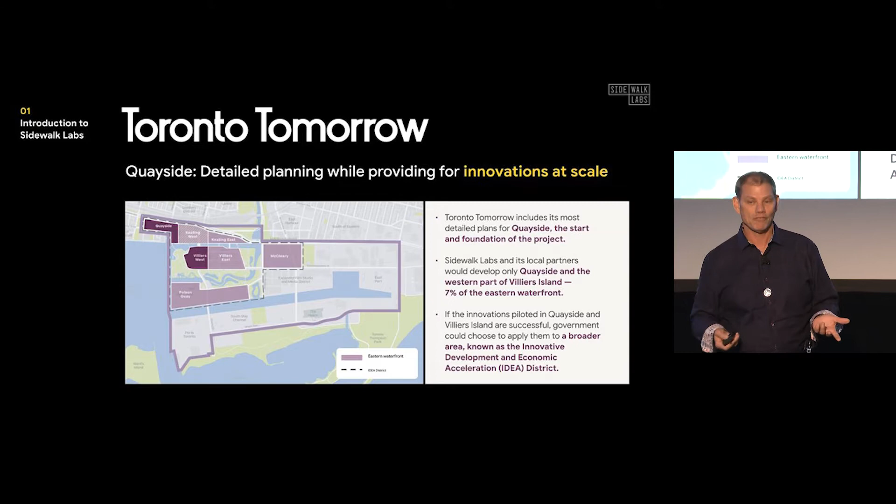At 3 million square feet, we couldn't get much efficiency out of it. The factory we want to build these buildings also needs about 5 or 6 million square feet to pay for itself. So we made that suggestion. That one got pushed back today in the note, and it will still be discussed, I'm sure.

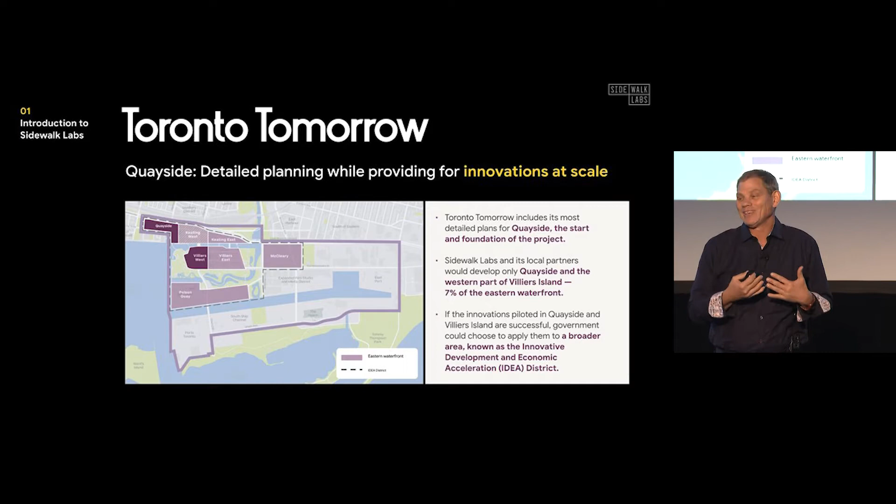The rest of the area, we thought whatever innovations really go well in Quayside should be multiplied across the rest of the area, because the more scale you get in exchanging heat, autonomous vehicles, factory buildings, the better and better we can get at it and show the world where it can go. Don't forget, phase one is only phase one—there's lots more development after that.

Here's a little image of what that could be. It's about 67% residential, a mixed use. This was diagrammed out with timber buildings throughout, so I think this would probably be the largest timber community in the world today.

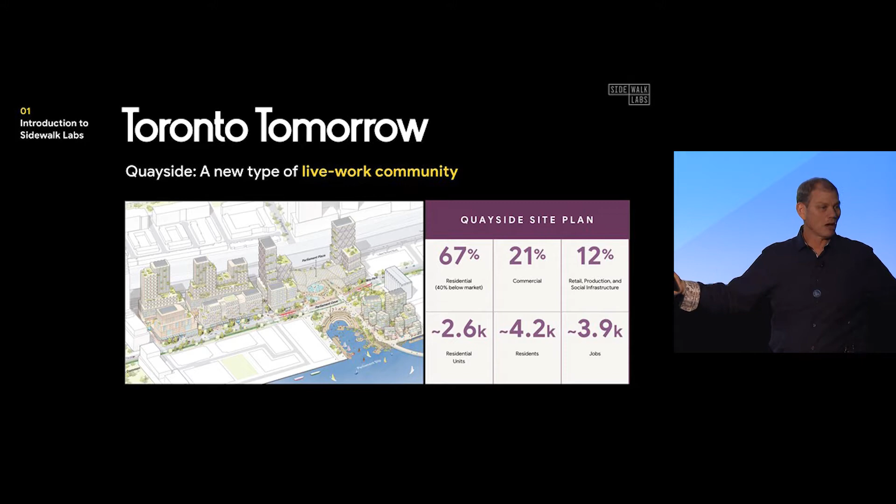Across the street, it's been awesome—other developers now have joined, and they are building 2 more timber buildings. That's done by the Hines Corporation, and George Brown College has their new library called the Arbor, also in that location. So we end up with this on both sides, not just our development but the whole area, an entire timber neighborhood.

So a little bit of our approach to design, this is around master planning. We use a generative design tool, and we ask which one is the best layout. Do you want daylight, affordability, walking, views? We ended up with thousands of variables, not just these, and we started doing iterations on how we could design the city. But we didn't just want to show the design of the city and how we could iterate it.

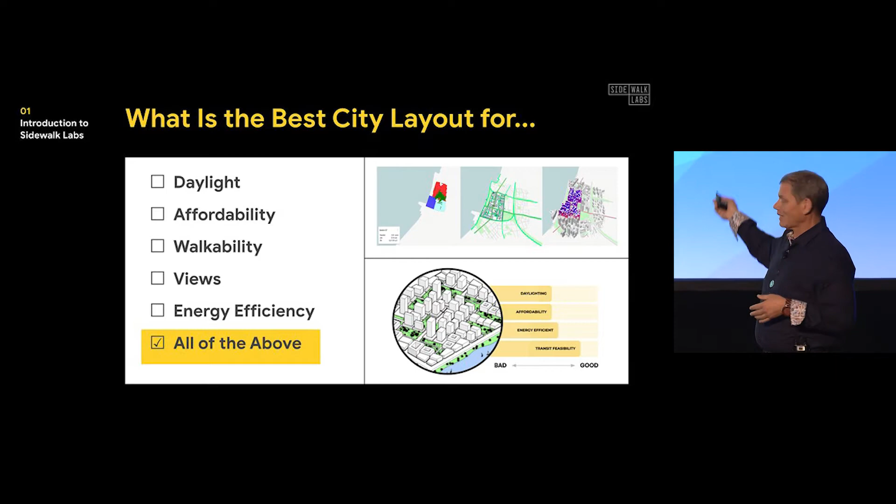We started modeling what the outcomes would be. So if I start finding spaces inside the city where it's dark, there's not much wind, and there could be a buildup of humidity, I have a mold area. We started to talk about how this would impact the operating model of the city if we know where these pockets are—can we change how we clean spaces day-to-day in certain places that have this type of environment? And in sunlit places, we could lower maybe some of the cleaning regimes we had.

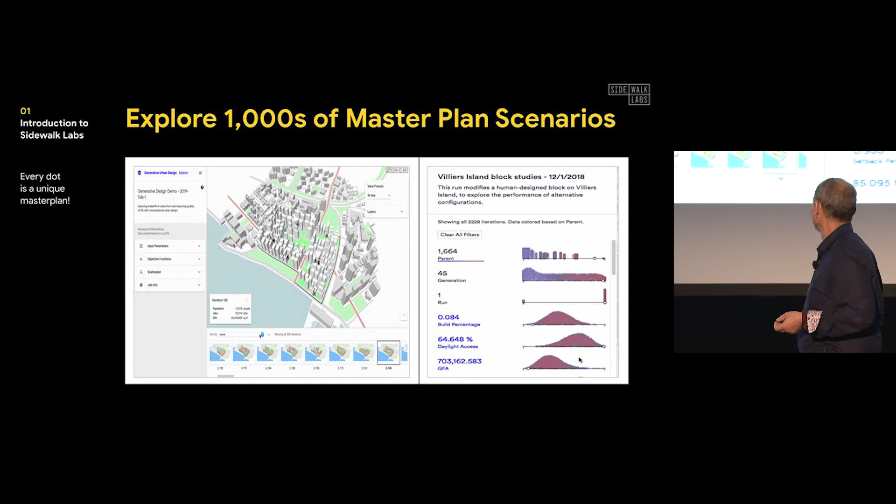So we started to optimize how the city would actually operate the streets. We started feeding the computer systems with all these different cities, so there were all kinds of variables of layouts that they could think through.

And then finally, we gave it back to the residents. We gave them 8 variables at a time—a couple thousand would be hard. They could dial in: do they want a park? If you get an acre of park, do you want it all split up against each parcel, or one big park in the middle? And the citizens then start to have trade-offs—how do I want to experience my city?

There's a happy face and an unhappy face, so if they hated their result they could vote on it, and if they loved their result they could vote on it too. They got to see all these variables: do you want one big dense building and lower other buildings, or do you want all the buildings to be about uniform? Do you want a grid pattern, and so on? This was terribly fun, I have to say. We'd get the results, and then change the variables for the next groups that came in.

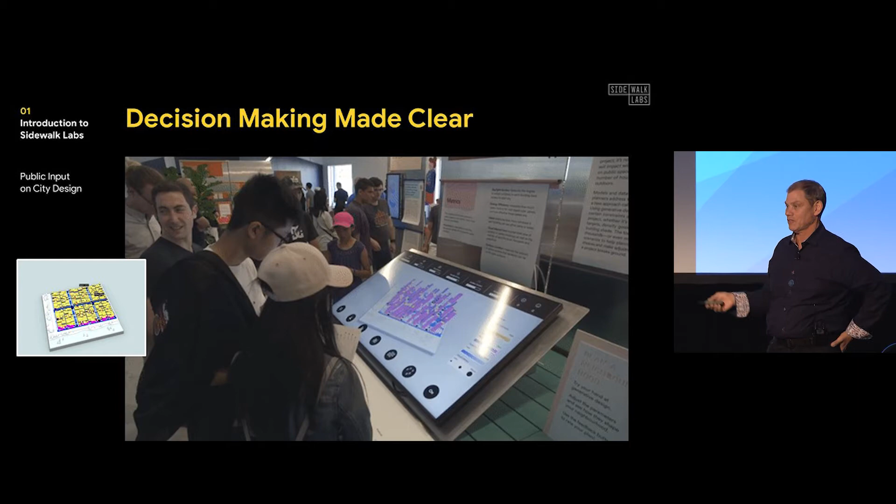So why mass timber? Why do we do it? Happens to be that Canada has a lot of it—they have about 10% of the world's timber.

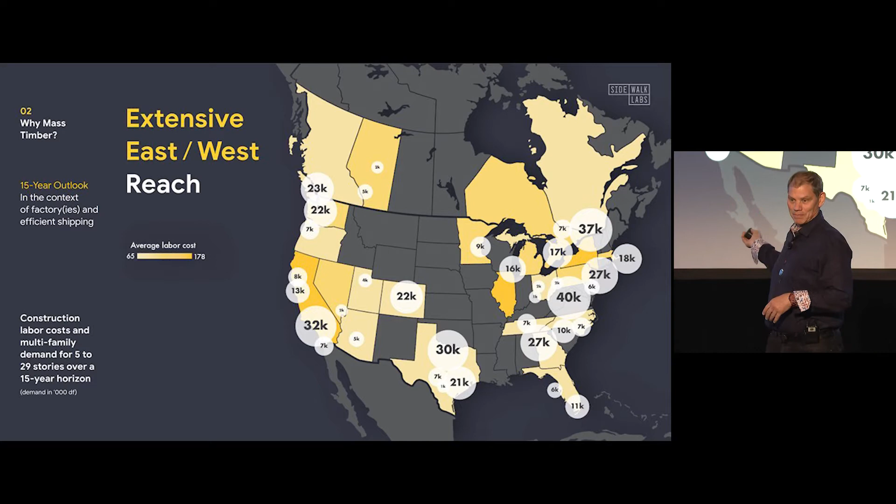Then we started looking at where we have a lot of tall buildings going up. The dark yellow is where labor prices are very high, the light yellow is where labor prices are quite low. So you ask, where can I have low labor prices in a factory supplying into a high labor price market that has a lot of buildings going up? You can see it splits up pretty much on the east and west coast. Texas is also in there, but if you note, their labor cost is quite low—it's a light color in here.

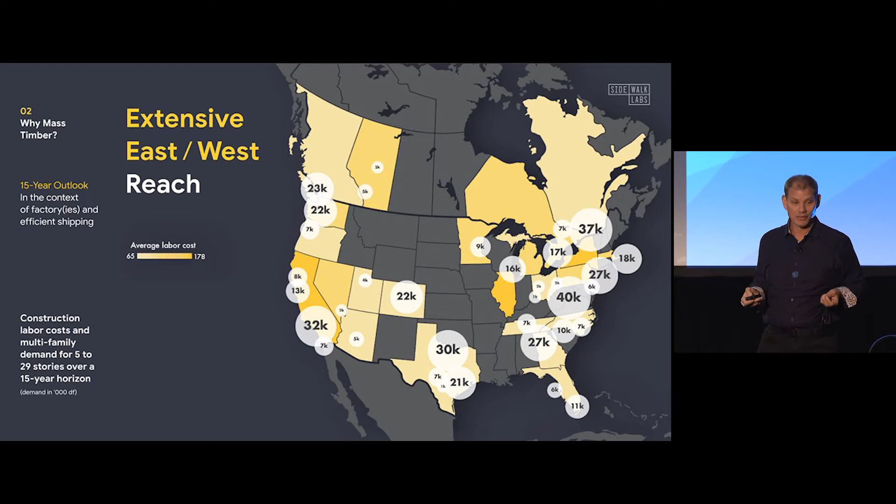But this is how we started plotting where we should put a factory to start building these buildings. Toronto, in the upper right, is actually in a pretty good spot to find a good labor market importing into a major city. Toronto is the fastest growing city in North America right now, by the way. So then we started looking at the supply chain.

So we need to go back to the forest. What kind of timber do we need to be cultivated? These are tree farms. How do we collaborate with the local sawmills so they create the right type of timber? Dimensional lumber isn't what we need. We need a very well dried out timber in order to make the strength panels for our buildings.

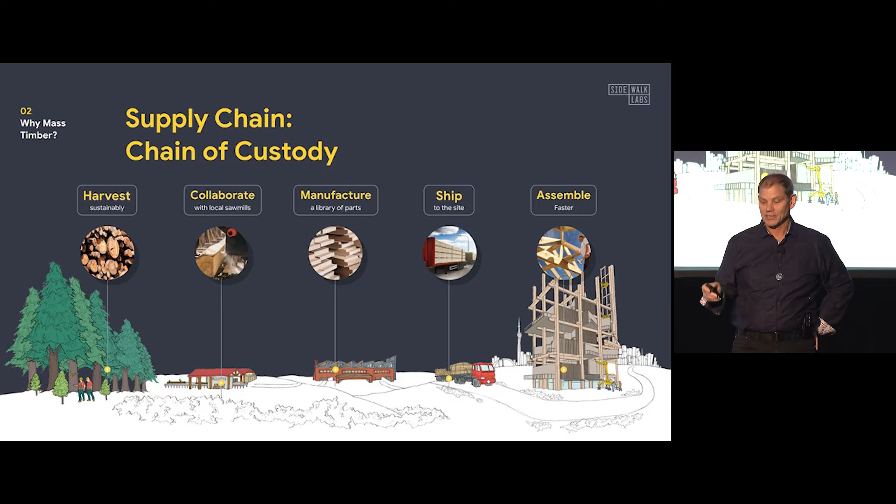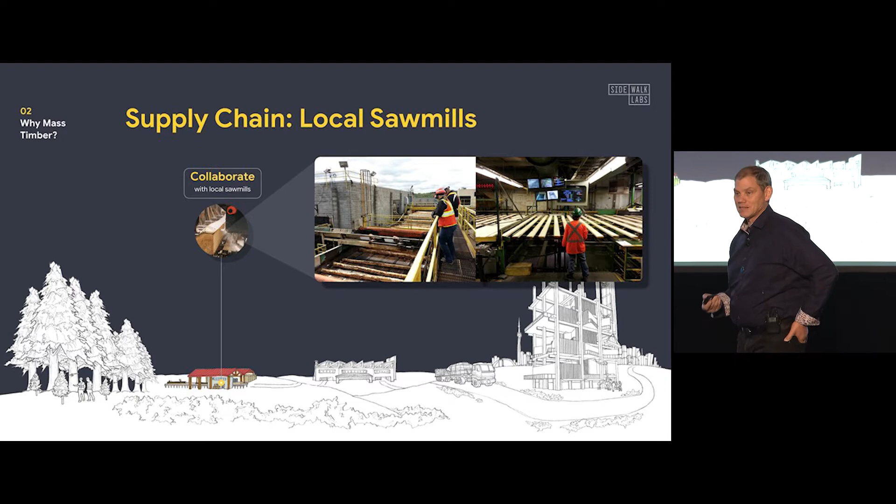And then manufacturing, shipping to the site, and then assembly. So we think all of our timber has to be certified by third parties. We want to collaborate with the sawmills so they make the right pieces that we need and the right species.

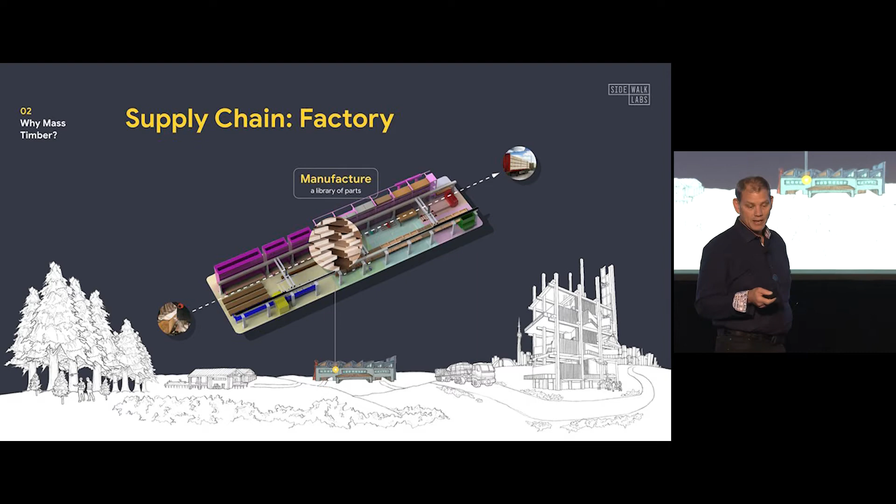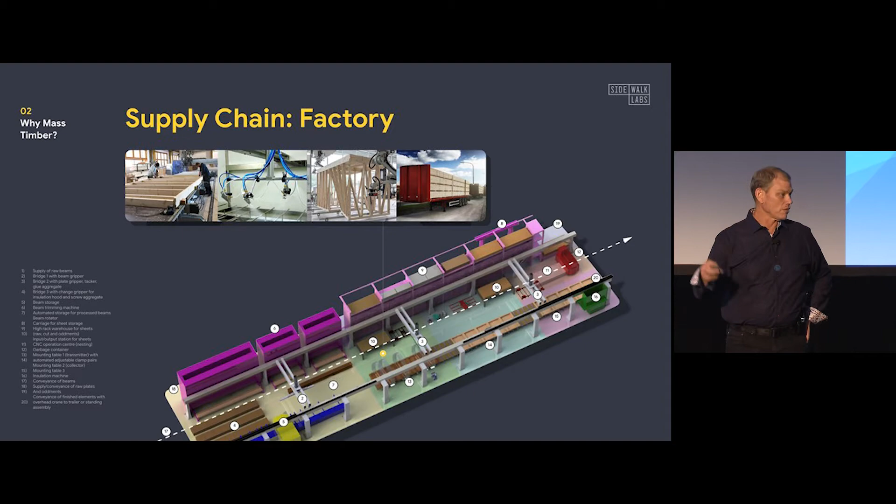We don't see anybody doing factories like this, especially in North America. You do find them in the Scandic and Alpine countries, but not in North America. So we started to design this factory. Our intention is to build an $80 million factory in the Toronto region to actually deliver all the buildings that we showed you on the 3.2 million square feet.

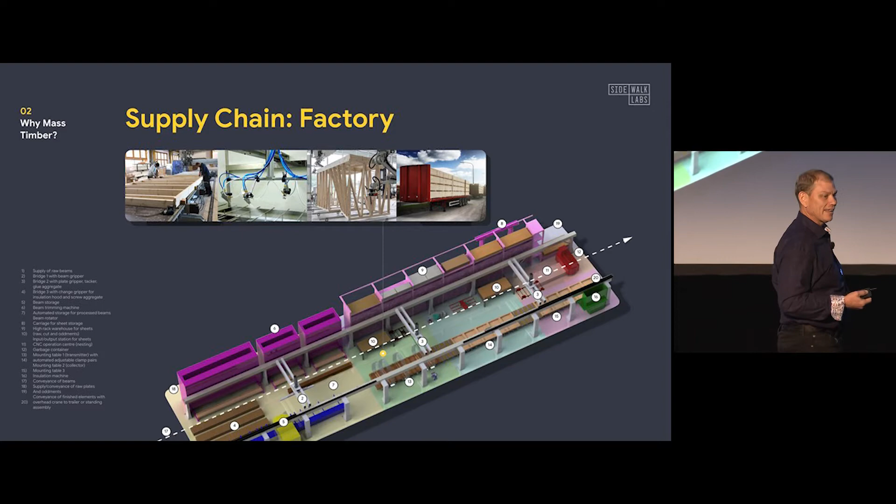We've been going with Swiss designers on factories. They have a lot of technology there. We look at how to do it by hand, and then we look at how to do it by robotics. We looked at our shipping, so the architects have to decide how big is the piece that they need to be able to ship, and how can we make that very efficient.

So the factory can be a longer distance if we know our shipping is very full. Timber is great for this because the volume of timber and the weight of timber max the truck out almost at the same time. Very unlike steel and concrete, right? You see a steel beam go down the street sometimes on a full truck.

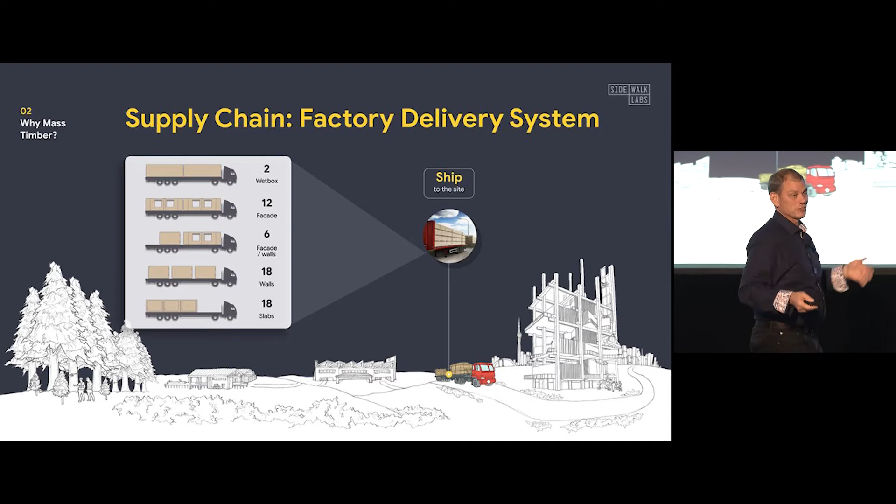In timber, you would always have a full truck. So we looked at, just for fun, this elevated highway. If we built a 30-story building out of concrete, and put all those concrete trucks bumper to bumper down the Gardiner Expressway, it would be 14 kilometers long. If we do the 30-story building in timber, it's 2 kilometers long.

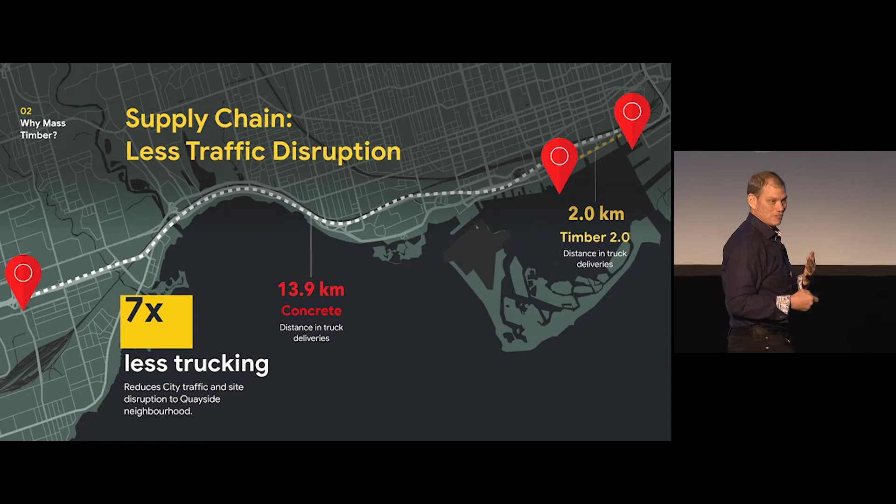So we have efficiency, but also we have disruption. We're mitigating, right? For the neighborhood and the road systems, and the wear and tear on the roads for all that trucking. So this is some of the side benefits that we're starting to get as well.

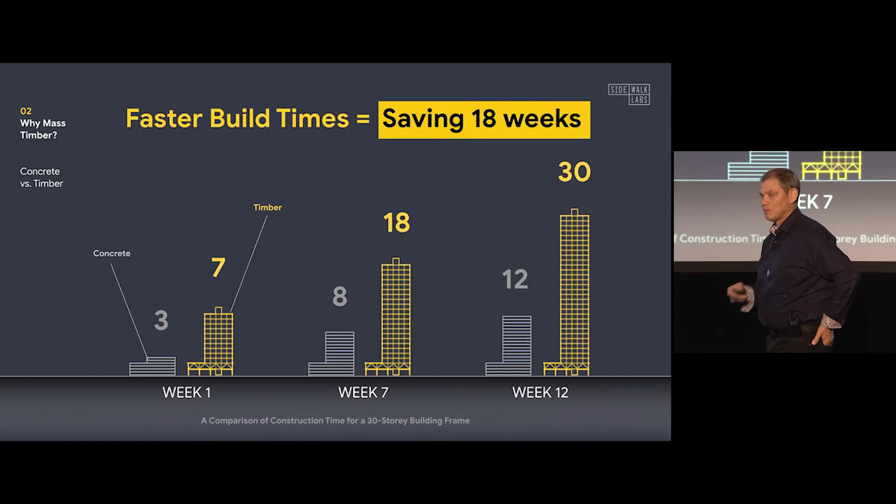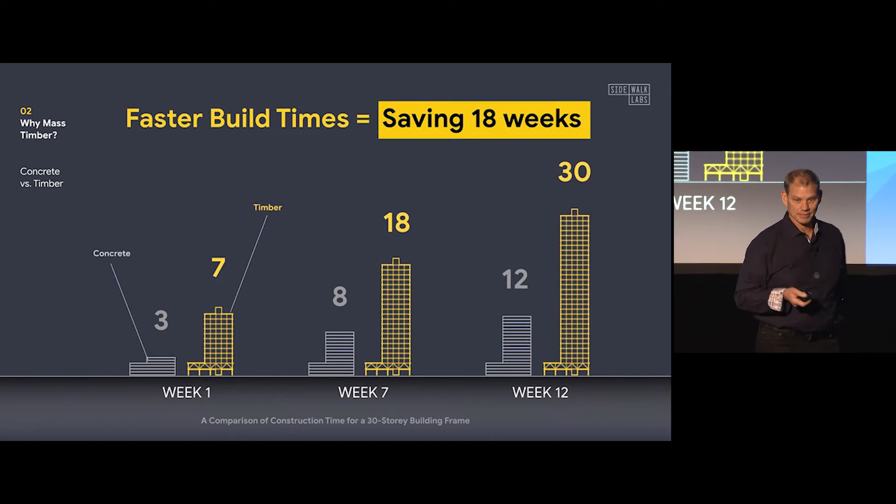So then we went into how do we assemble this building? So we modeled a building. Concrete is typically a 5-6 day cure, so you turn a floor about every week. So in 12 weeks, I can have a 12-story building. In timber, we can do a 30-story building. That's the speed of off-site construction, bringing those pieces in.

So I'm going to talk to you a little bit about sustainability. I'll go through some mass timber with carbon sequestration - you probably know a lot of it, so I'll go quickly. And some other important elements: cradle-to-cradle materials, biophilic design, reducing waste, and finally some hybrid electric systems.

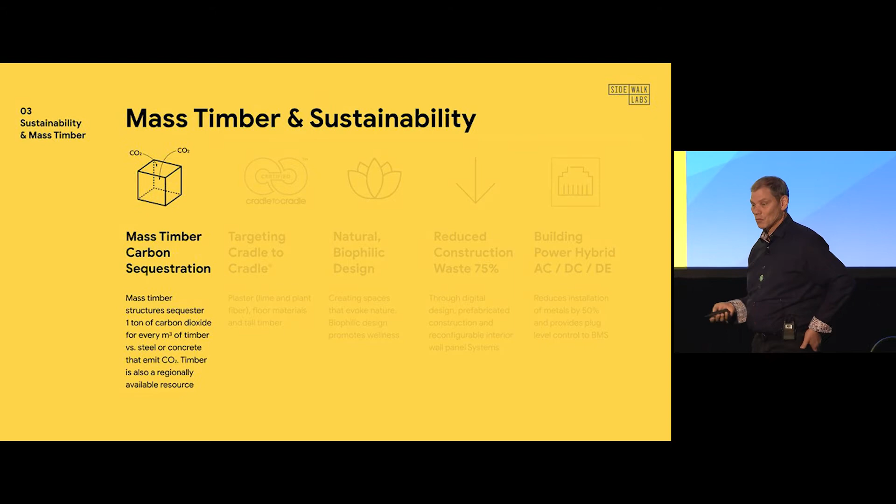So this is my diagram saying sometimes I think we don't build buildings, we're actually building carbon vaults. It's a nice way to think of it. People don't understand it, but if you actually leave those tree farms for those trees to die in 20, 25 years, they're going to re-emit the carbon dioxide that they have absorbed through photosynthesis back to the atmosphere.

So if I cut it down and put it in a building, I am now going to hold that carbon into that material for as many years as that building lives - 75 years maybe, let's pretend. But not only that, I'm designing my building to be disassembled so all those pieces can be used again in another structure. We do that already today, right? Barns - people who have flooring that they take from an old barn.

Well, that's the same kind of system. So what if we design that from the start so all those pieces can be reused? Wild.

We can keep them this way whilst carefully extracting wood and other products and valuing them as they are. By managing them well, we can work with their natural resilience to keep them standing.

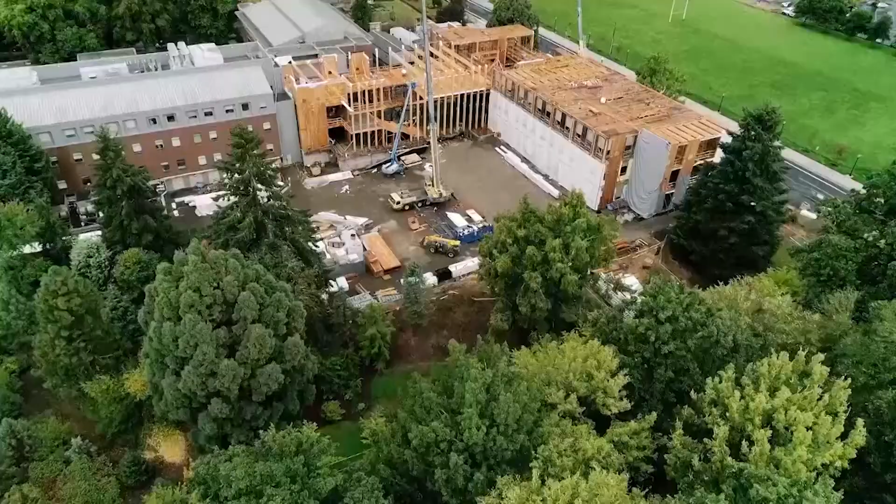It's a fact that our growing global population will need to use more wood. And that could be a good thing. Wood is an extraordinary renewable resource, and taking it from well-managed sources benefits forests and the planet.

But on their own, natural forests can't provide all the wood that we need. So we also have to farm trees, just like we do other crops, and create a new generation of plantations.

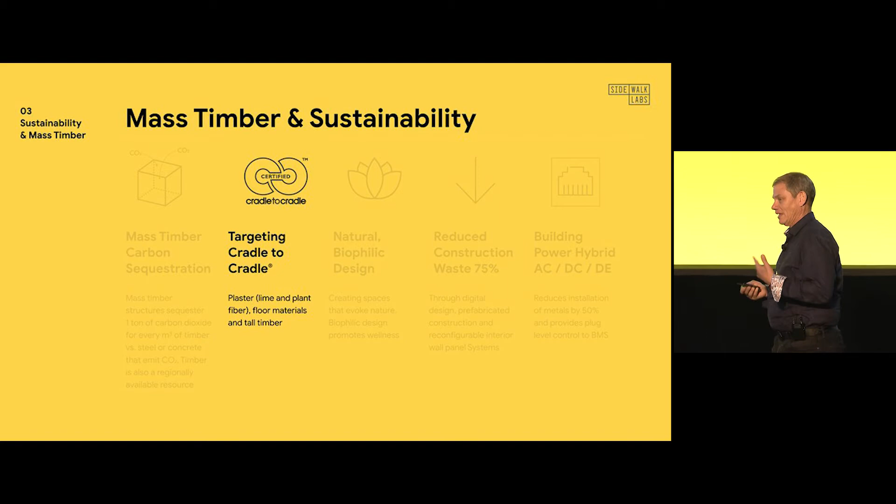It's great that David Attenborough did that for me. If you want to see it, it's on Our Planet, Netflix. It's a movie, about 20 minutes long, that goes further into this subject. I gave you just a little snippet here, but this is a big deal of where this is going and what we could do with it. I'll get to the depth of that at the end of my presentation.

We also went after cradle-to-cradle materials. We went after the materials that we think get reused the most, meaning during renovations they get disposed of and need to go back to their natural state. So we looked at the timber members themselves, but also came up with a plaster system, which I'll show you later, that's cradle-to-cradle and does our fire protection coatings for us. All of our cabinetry is the same, and our flooring we also buy as cradle-to-cradle materials. These are the things people consume and have to redo every time they renovate and occupy a building.

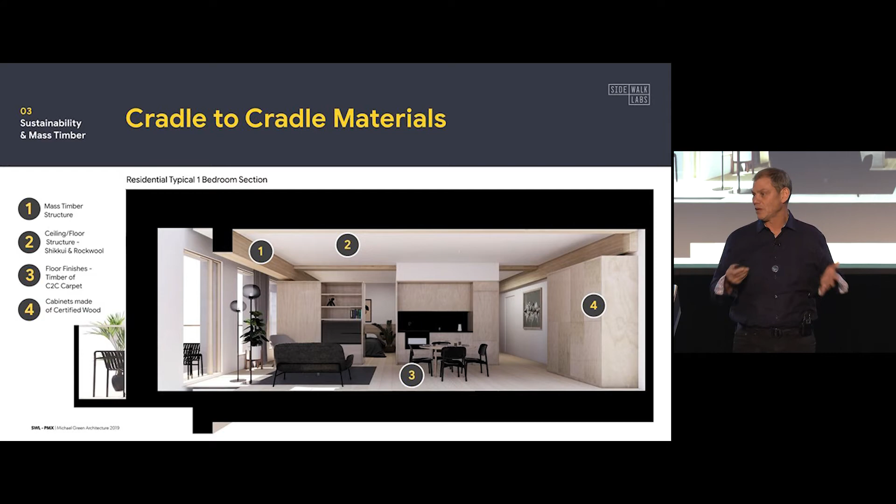Biophilic design is how these buildings make us feel, but better than that, they actually have a physiological impact on us. People's heart rates drop, you can measure the cortisol in their saliva and it goes down. So these are good for people. People heal faster - there have been experiments where they heal faster in timber buildings, people recuperating from operations, using the same operation in one building versus the other.

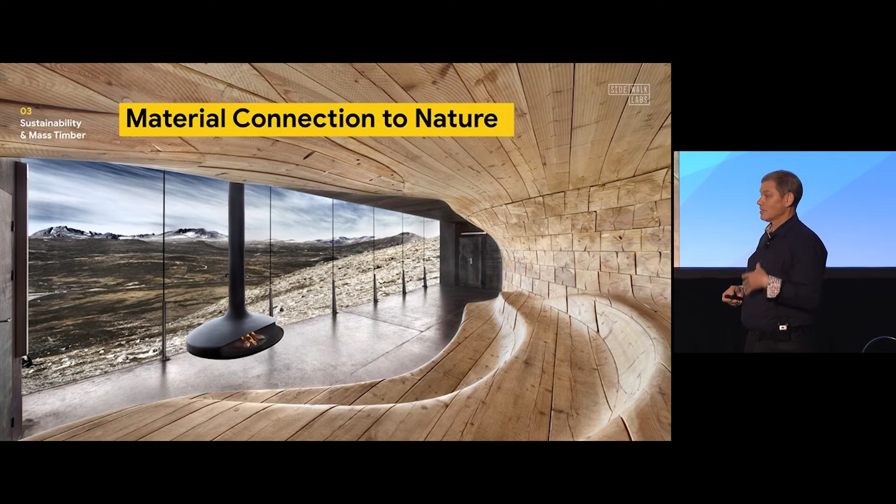We can reduce our construction waste, so that's not only the trucks coming in, but all the waste coming off the site. It's not only the landfill, it's also the trucking of all that material as it leaves - thousands of dumpsters.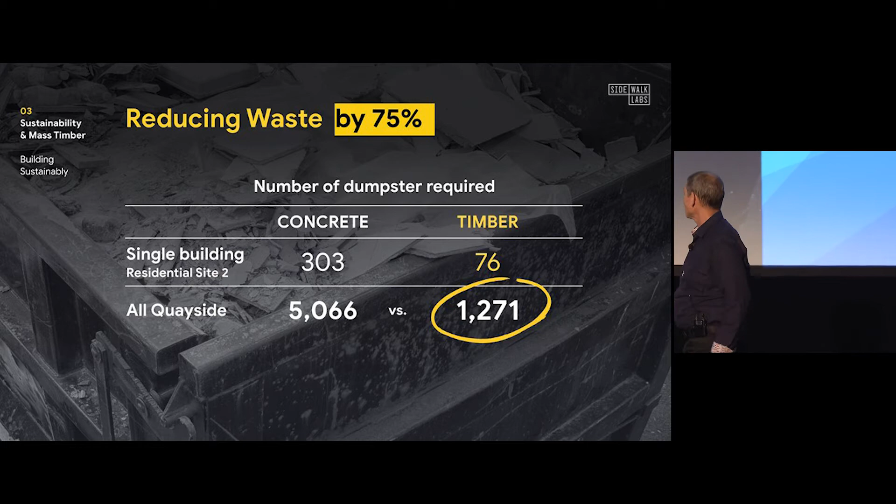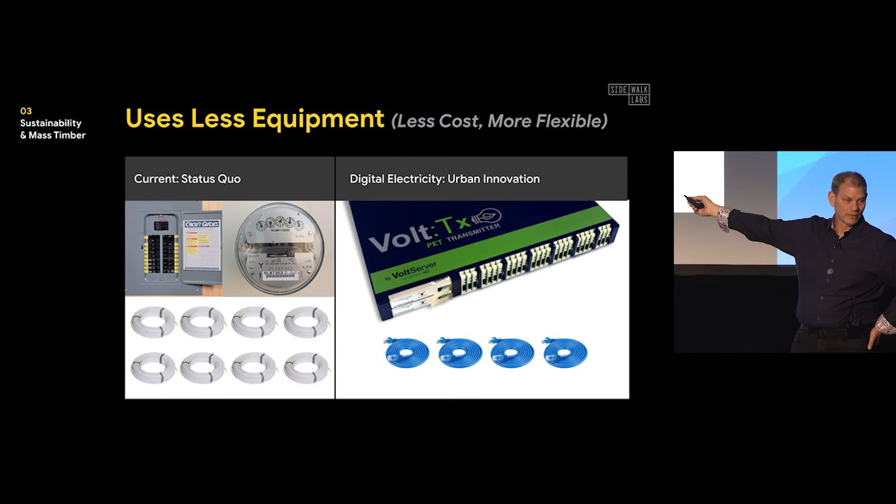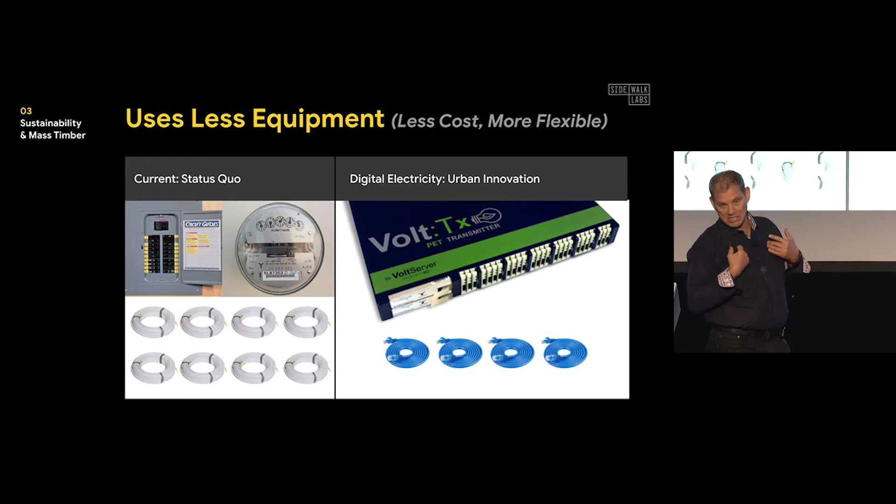And finally, energy, and this has a big impact. I'll get into it in quite a bit here. This is digital electricity. We're able to use this system to send between 2,000 and 3,000 watts over an 18-gauge wire - this is pretty close to a telephone wire. We can then get rid of a breaker panel, we can get rid of the meter, and we can get rid of half the cable. Every wall plug in these buildings will have an IP address, and now I can infinitely control the loads centrally - me as the tenant, maybe the landlord, whatever situation we're in.

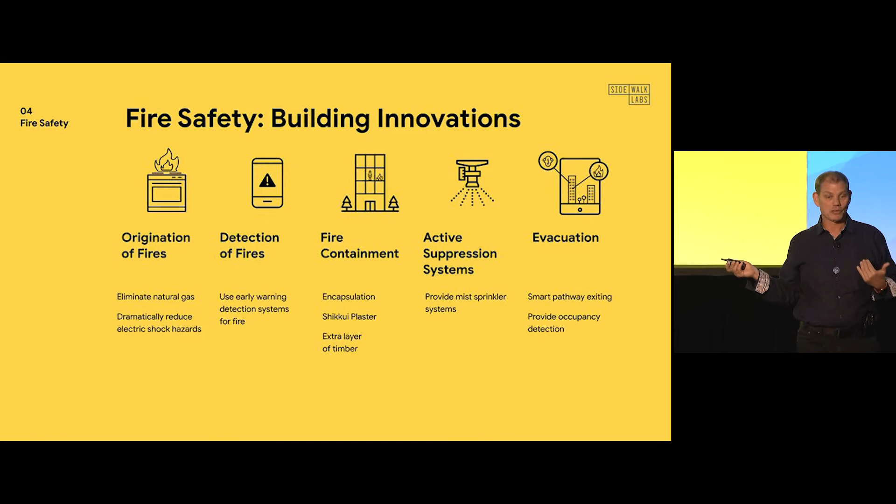So now I'll get into fire safety, and we'll get a little bit back to digital electricity. Everybody's worried about timber buildings burning and what's the impact. So we decided to take a step back and say, what's really fires and buildings all about? Maybe we should address this not just about timber, but just about buildings. That's what I'm going to show you with some of these pieces here. So we went after the origination of fires.

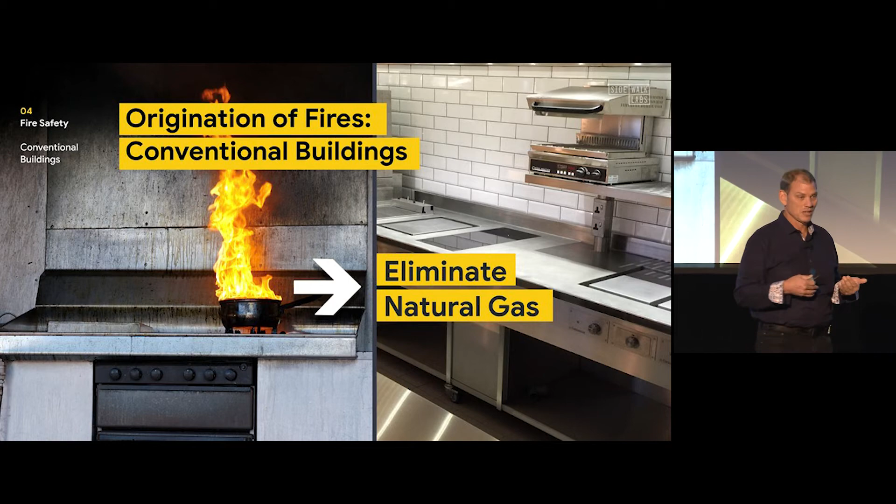So we aren't going to have natural gas - Toronto has natural gas in the neighborhood, but we are not going to have it, to meet our greenhouse gas standards. We also converted everything to electric - the whole building is electric. When we showed this to the firemen, they said that's not really helping me, because even those electric coils are a source of fire for them - a grease rag on an electric coil can still produce a fire. So we went to all induction, and when we did, they said now you're doing something really important for us. They estimate we could see between 10 and 17% reduction in fire source by getting rid of the heat in a kitchen.

So then we said, how about our electric system? This digital electricity, which I showed you before, ground faults 30 times faster than the fastest ground fault protection we have out there. It's now not rated as an electric system, it's a data system, so it doesn't go into conduit. I can run it on the surface, actually without an electrician, and it frees me of having another electric fire source - that's about 17% in Toronto. So between the two, I'm now taking away maybe 30 to 35% of the potential fires from a city. That's a big change for them, right? The fire department was really interested in this space.

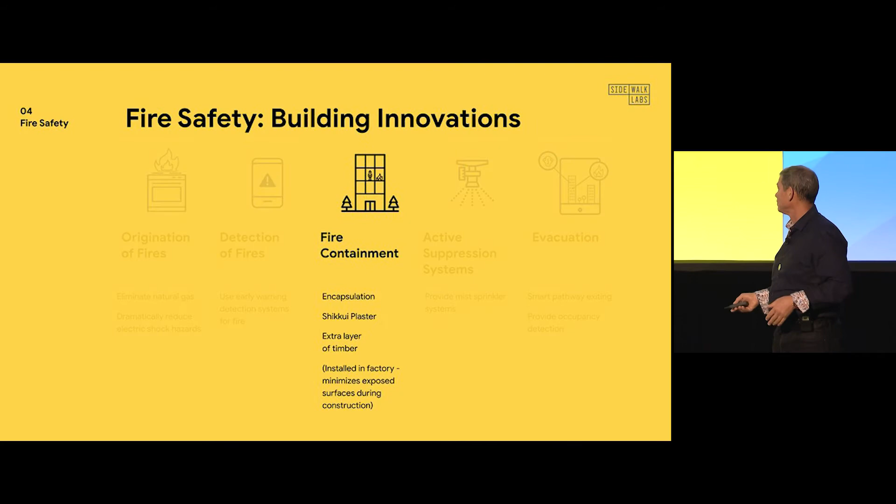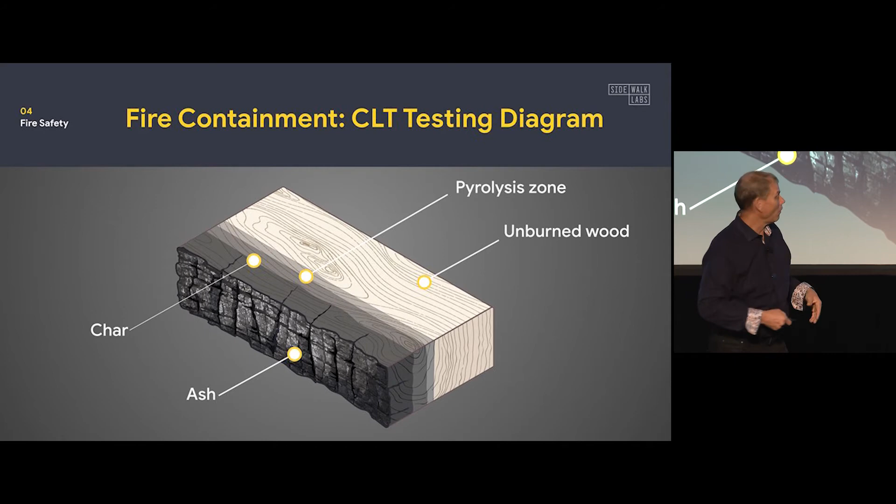Then I need to encapsulate spaces, and there's two ways to encapsulate using timber. Either I have the structural piece and add a layer that ends up getting charred and protects the structural core of the timber, or I actually coat it, and traditionally this has been drywall. We knew we were going to have these coatings, and we said, but we have this beautiful sustainable timber - let's coat it with something as sustainable. So we found a cradle-to-cradle substance called shikkui. It's only 1,000 years old.

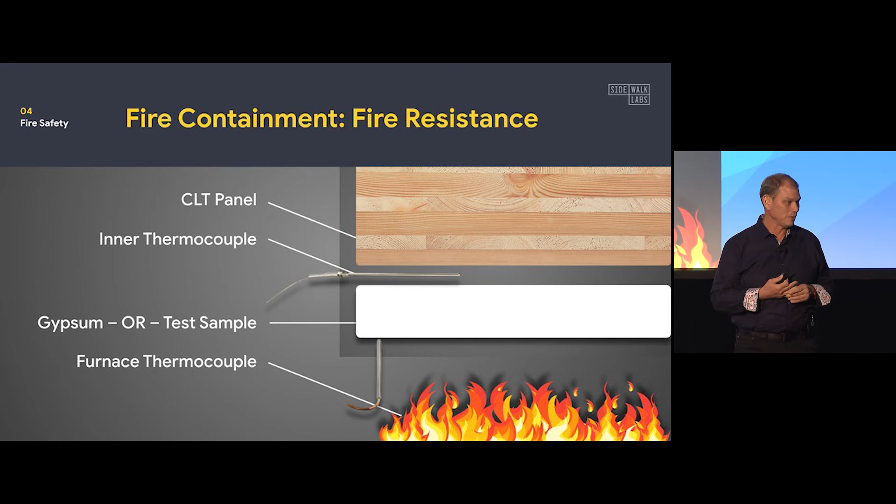This plaster is only 1,000 years old, and it's used in Japan a lot. We started changing the chemistry on it, playing with it, figuring out what type of slurries we could create with it and how we could apply it. Eventually, we started to build our floor cassettes and put the coatings in there.

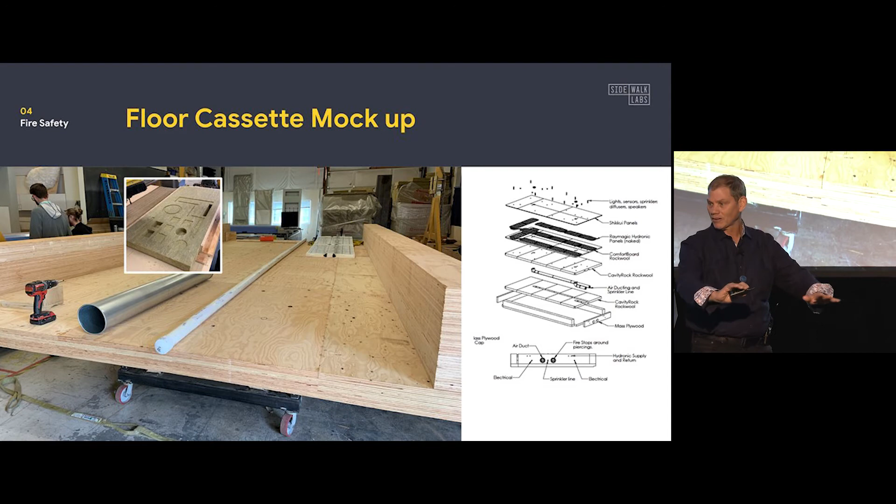We put all of our pipes in there, our radiant heating and cooling. We put rock wool in there as an insulator for sound and fire, and then we coat it with this plaster system. We took it to a fire test.

They did it in the factory, then we did it in laboratories. We've done about 8 of these. On the left-hand side you'll see the Shikkui plaster test, and on the right is the same test done with drywall. You can see the flames starting to come through over here—I'm talking about the two panels on this left photo.

So then when they lift it off, this is a furnace with heat rising. You can see that the Shikkui panel on the left is still basically the same, while the one on the right is charred through the drywall. Both passed the 2-hour test.

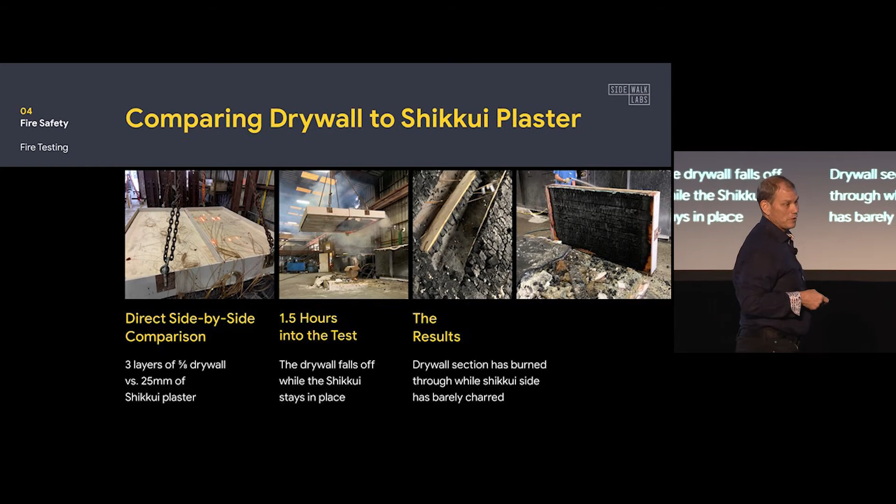But when the fire department sees this, they say, I'd like to walk into the building where the ceiling's not falling on my head. So we went through this, and now we're taking this to a slurry operation where in our factory we can pre-coat and fire-protect all of our systems.

And then finally, active suppression—we're using mist sprinkler systems. This is a 1,000 PSI system out of Finland, usually used in marine applications, with 3/8-inch tubing. We can now run that very cleanly inside our buildings. It uses about 1/10 the amount of water, and it also covers our lithium-ion batteries and kitchens, so we have one fire suppression system for the entire building.

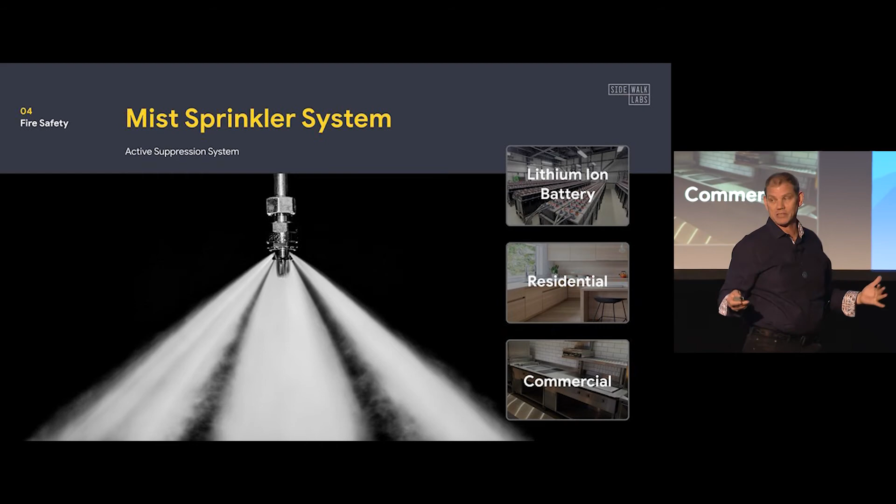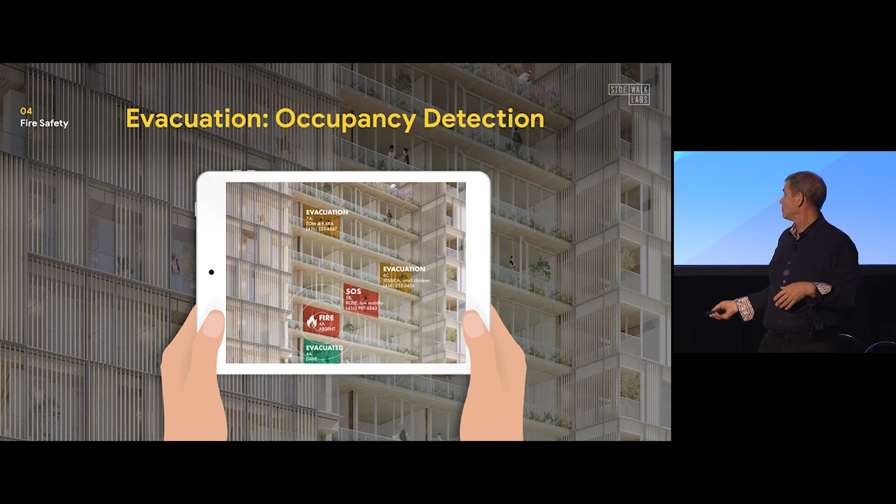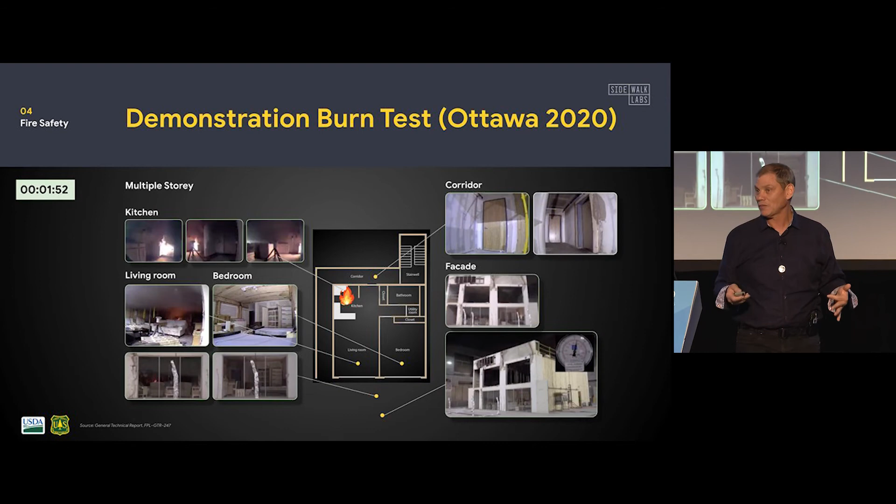We will finally do a demonstration burn, a 3-story demonstration burn, probably in Ottawa, to take a look at this. I thought it was kind of interesting—I wanted to show you that we didn't just look at fire, but how to protect the wood. We asked, how do we make a much better building out of this, and how do we take away some of the risks?

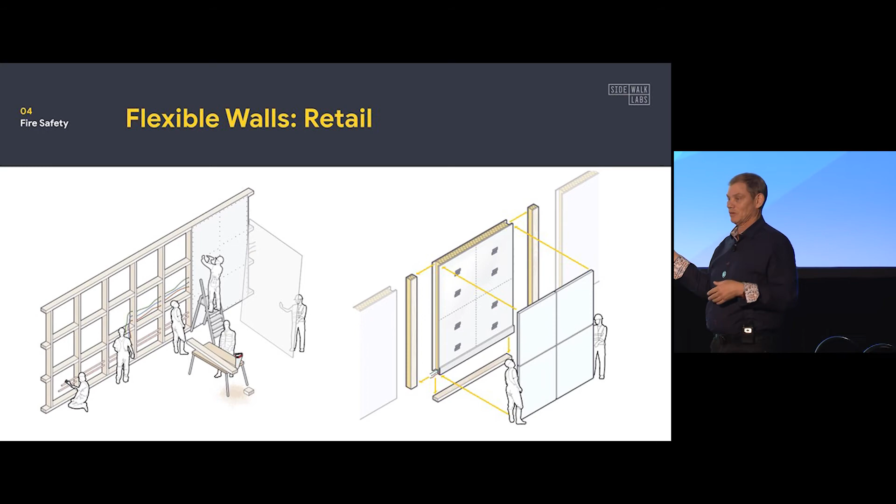So this is the outcome of that as well. On the left-hand side is a traditional wall with all those cables and sprinkler pipes passing through it. But now with my systems, I don't have sprinkler pipes I need to put inside—I can put my sprinkler pipe on the surface of that wall and hide it through a piece of trim or a reveal or whatever we can do architecturally.

And at the base, my electric system runs behind the baseboard. So when I'm renovating my space, I don't tear up the walls now, and I don't have a waste stream from that. I actually remove an entire panel out of a system, and I can even reuse that wall again and again. So we totally rethought something as simple as the wall.

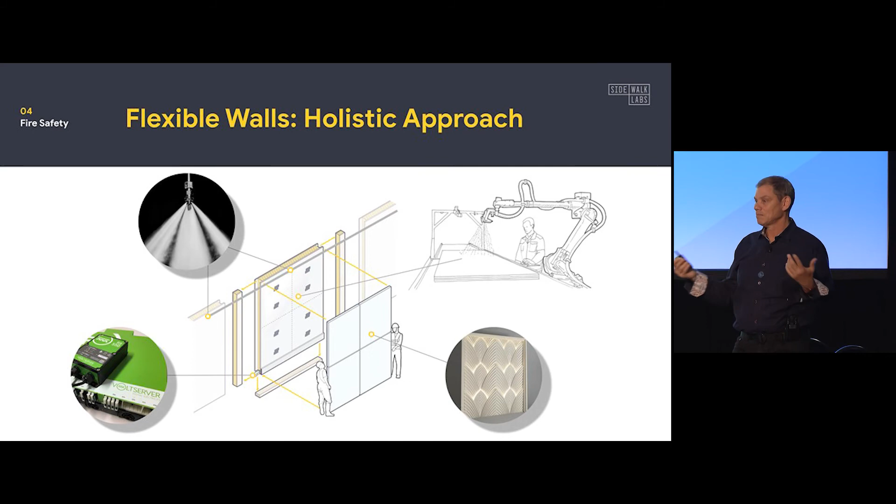That's kind of our DNA—to get back to basics and think about what we could do. You can see the sprinkler head is there, the electric system is there, the panel is coated with shikui, and on the bottom right we put something like a retailer's own branding panels on top of this. So now I want to go to the proto model.

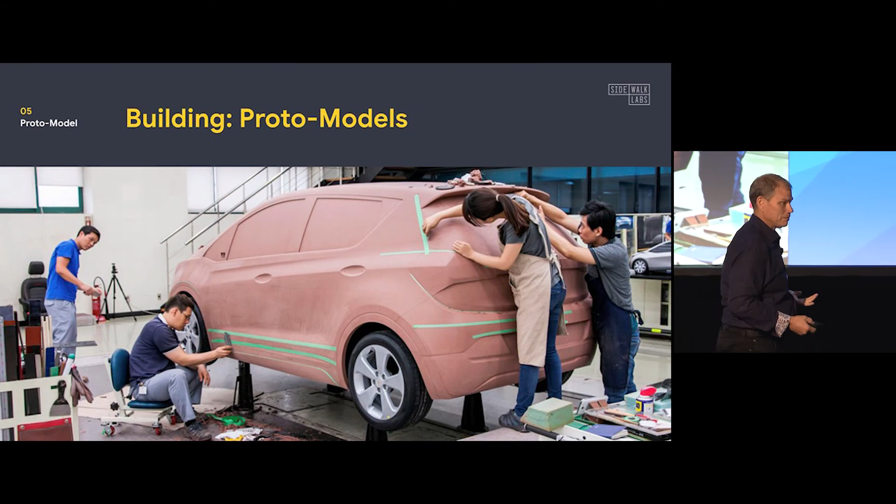We are building the foundation in the factory for great architects, like we have here today, to pick this up and do something with it, knocking out a lot of the guessing game of how to make efficient, well-insulated, energy-efficient buildings in a beautiful and sustainable material. So we went through first the massing, and then we went into a building we call the PMX—proto model X. X is cool, so we just used an X, I guess. But really, it was our workhorse; we put all of our innovations into one building.

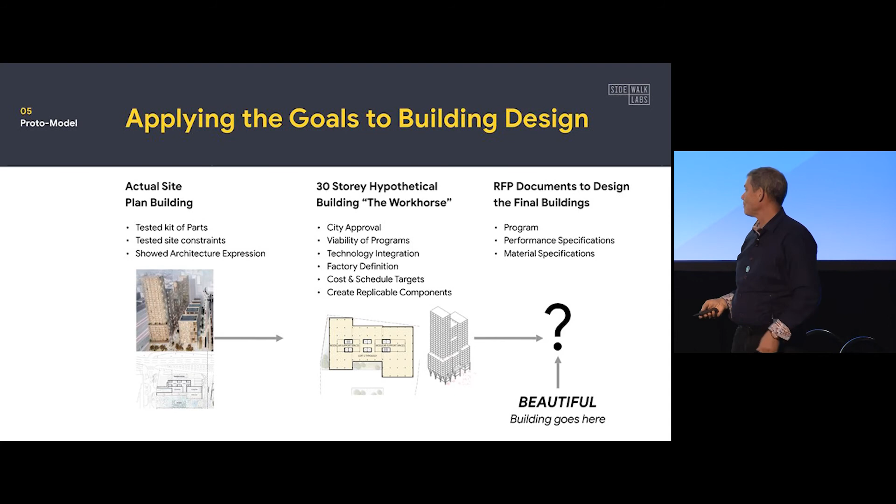And this is what it looks like: a 30-story building with an exoskeleton frame. The core does almost no work for us here—it's all really being done at the exterior. This is common in other architectures, but this was the most efficient way for us to do it. These were all the consultants that worked on it. It is a proto model, but it was a full team and full analysis.

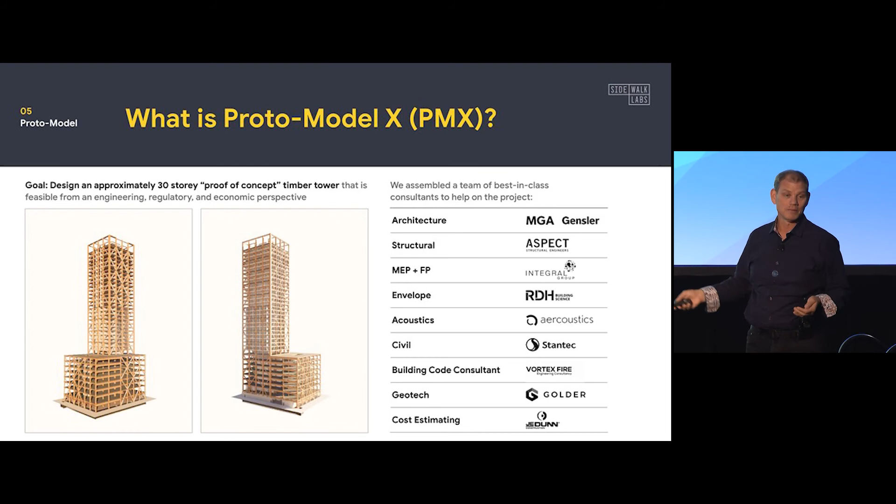Site massing program - we looked at programs of all the different things: ground floor plane, commercial space for offices, different types of residential, all the typical things. And if you look at the efficiencies, we wanted to be as efficient as other buildings in the marketplace.

Our offices, our floor plate's 88% efficient in timber. Our residential is a little bit lower, and that's because all of our waste has a vacuum system, so we have 3 chutes that vacuum it out.

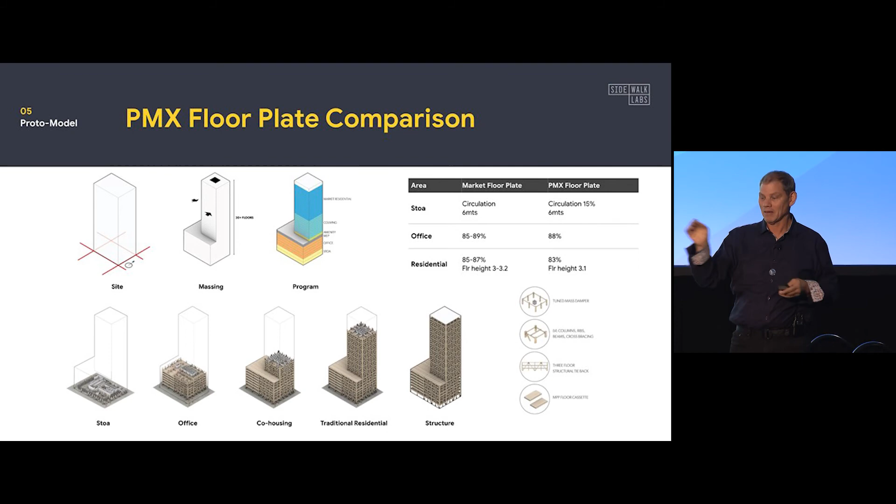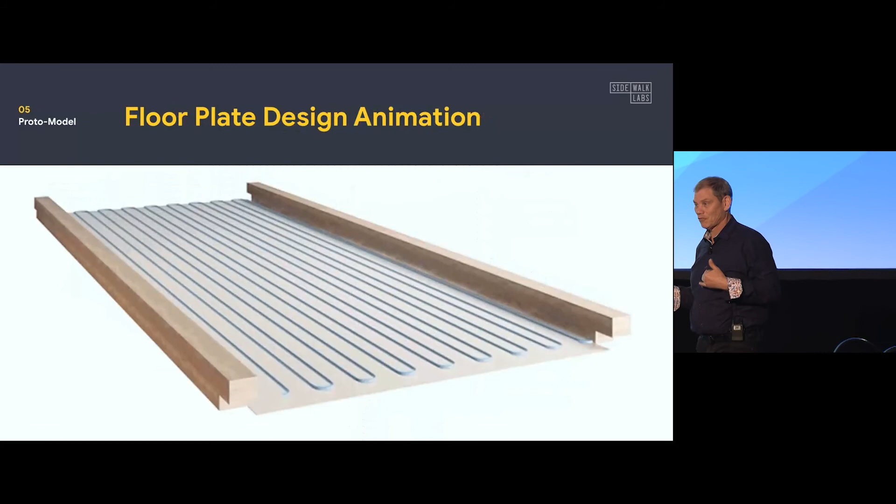These are our assemblies to build the building. Here are our units, and these are our floor plates, how we assemble them. So we do digital modeling - right now you saw the physical piece before. We're actually doing physical build-outs of these so we can study them. This is how the floor plates would fit in - they all have interconnections.

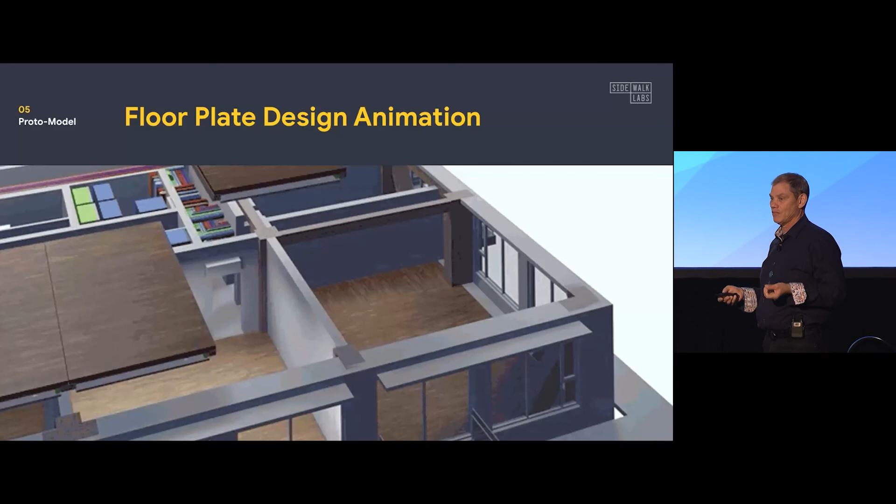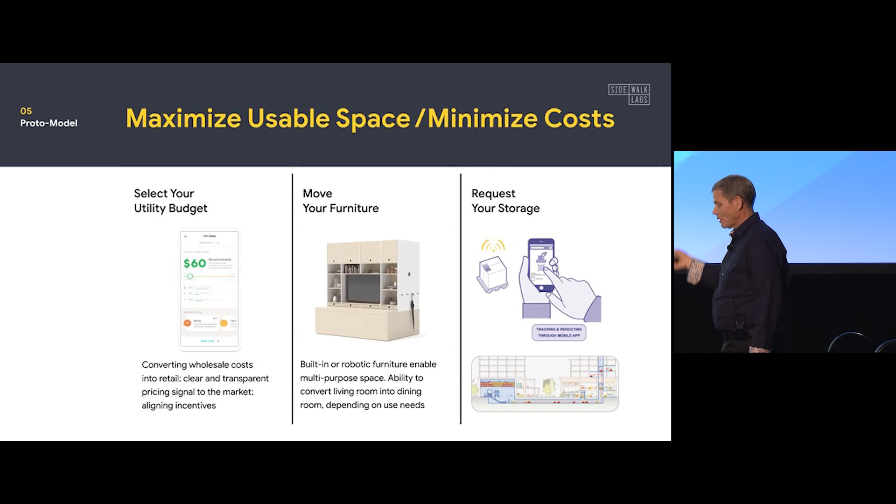We're working with Ori and robotic furniture and IKEA. And finally, we have remote storage for our belongings, so we could reduce the size of the units and use the basement levels, and they can all be recalled by small robots.

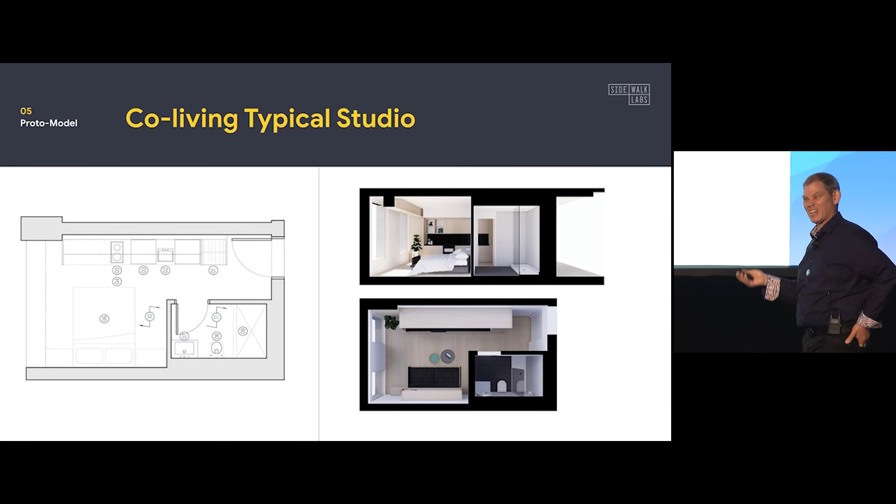This is kind of some of the layouts we had, some of the space planning. We have not gone through interior design - these were all really trying to get test fits in front of everybody. You can see we constantly talk about how these spaces get assembled.

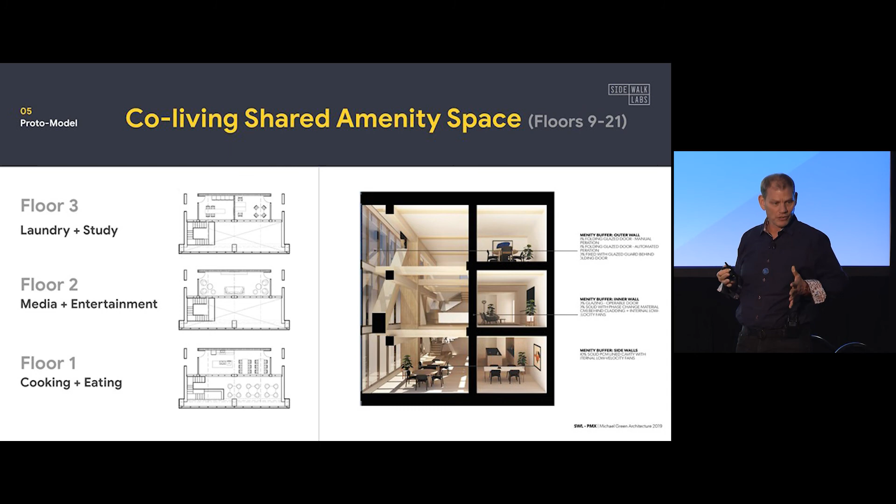You could have amenity spaces like co-living where people have smaller units - they can have shared spaces. So we looked at cooking and eating, more active, medium activity, laundry and study, quiet space.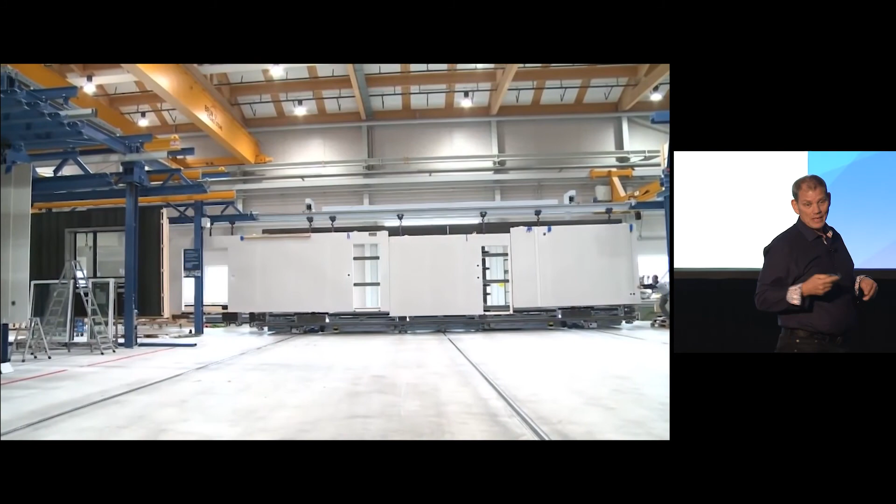And this is a factory that we've been working with that models everything that we're designing. They're in Switzerland - the name of the company is Renggli. And these assemblies are telling us how many steps we have to assemble it, how difficult it is to assemble, and which processes could be automated.

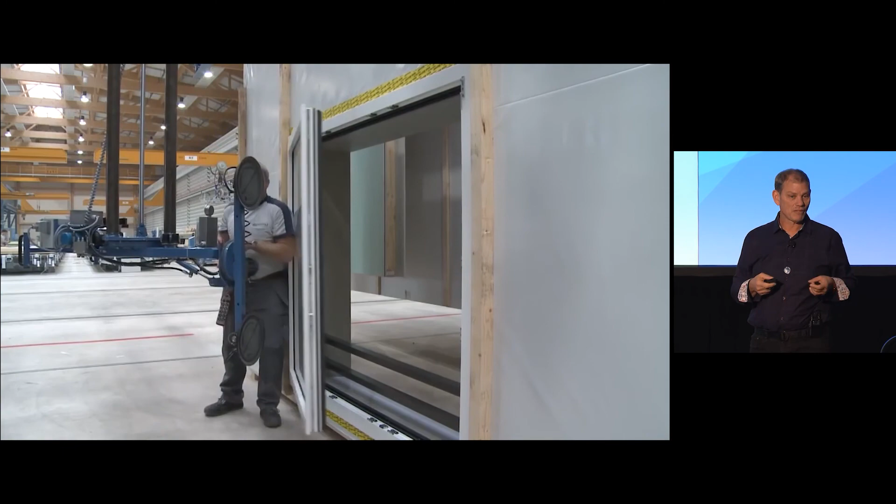We are intending to build one of these factories in Toronto. It will be our first one, and we anticipate building more of them around the world. All the pieces are stacked for their order of assembly.

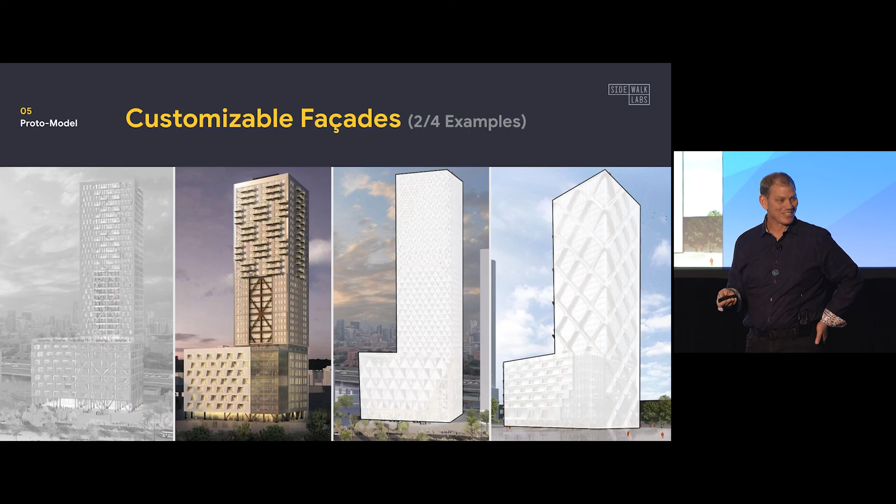So at the end, we say you could still do things with these buildings. I'm almost embarrassed to show these images after what we have just seen, but the concept is that we produce something from a factory that can be customized. This is a little bit of what a streetscape could be in this timber community.

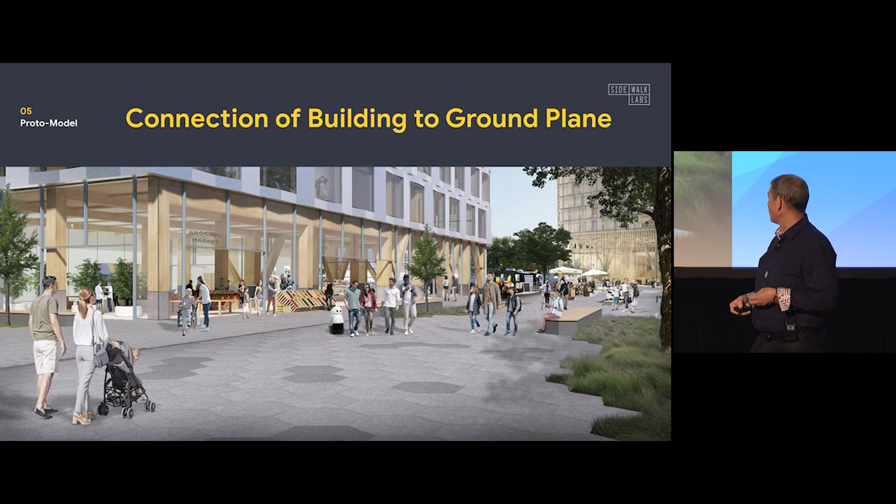So the question is, could we solve something bigger for the future? I just want to tease our minds a little bit about thinking about that future state of 50 years - could we do something bigger than building a timber community? Could we house the world? Could we use this process and start capturing more CO2?

And so we took a quick calculation and we said, if the annual population growth is 1.1%, that's 83 million people. If people that need new houses because their buildings expire every 50 or 75 years would need another 154 million, people would be housed into new housing every year. And then if we could house all the homeless people on Earth, 120 million over 10 years, that would be another 12 million people. So we need to house 249 million people every year on Earth to reach this goal.

And what if we did it all in timber? Is there enough timber supply in the world to do this? When we presented this to the Nature Conservancy and the World Wildlife Fund, they believe that we can reduce global gases, CO2 emissions, by about 11% by taking a step like this.

So I will skip the rest of this. And I just want to say, for us, this is really just the end of our beginning. We've laid the platform for a really bright future of mass timber construction across the globe. Thank you.